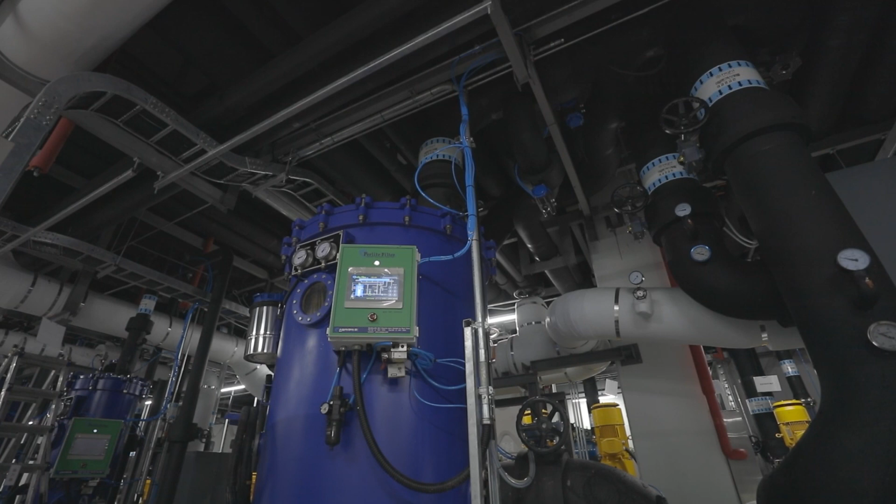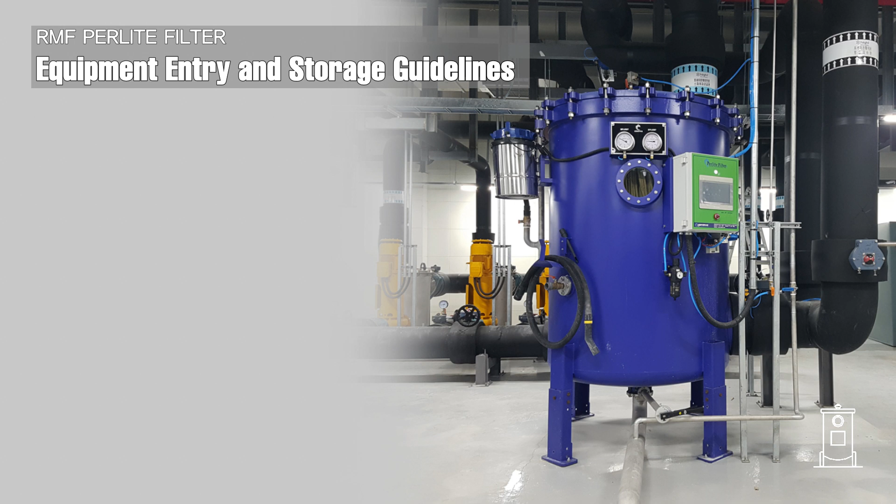Hello, and welcome to the commissioning guide for the Perlite Filter. The Perlite Filter is a high-efficiency system designed to conserve water by regenerating the media through a bumping process, eliminating the need for backwashing. In this video, we will guide you through the entire process, including delivery, installation preparation, and commissioning, to ensure your system is ready for operation.

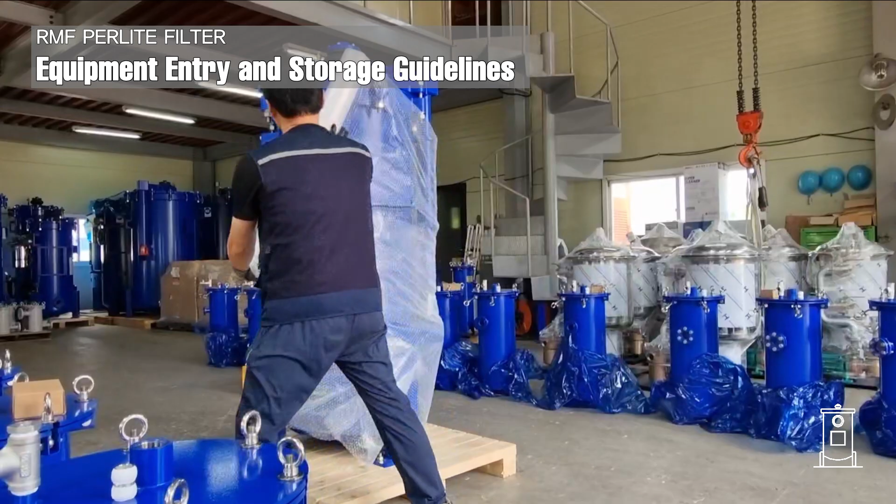This is the Perlite Filter, fully prepared for shipment. Before shipping, the equipment is securely fixed to a high-quality pallet to prevent movement and wrapped in protective material to avoid surface damage during transportation. During unloading, you may use a forklift to lift the pallet or the lifting lugs located on top of the filter.

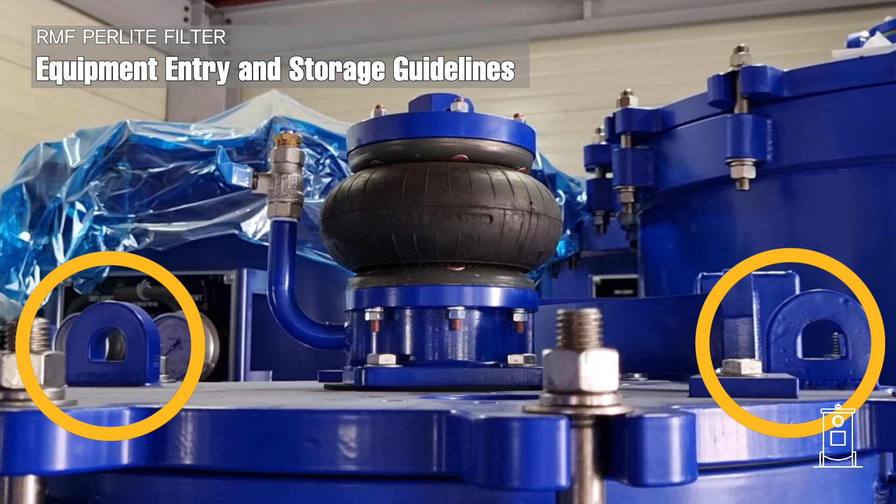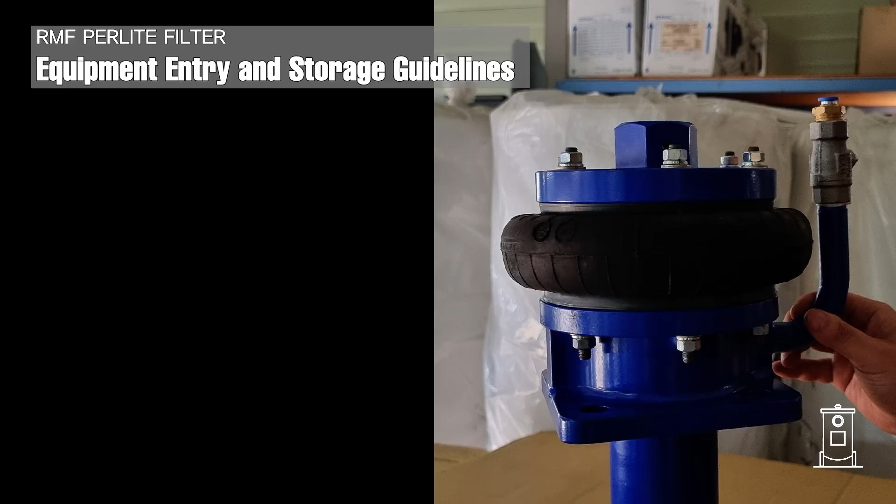Regardless of the method, always ensure the equipment is transported and stored in an upright position. After unloading, inspect the packaging for any damage and check that the bump tube pressure is properly maintained. If there are any issues, please contact Shinwa Aqua immediately.

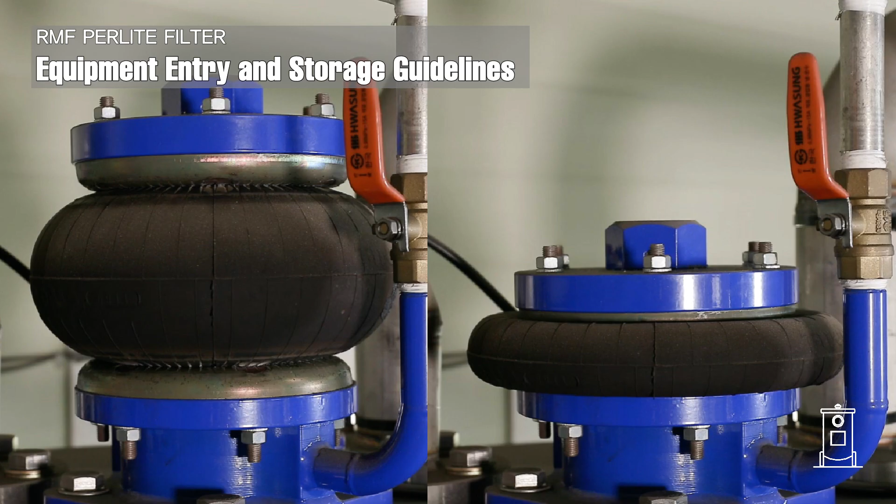If installation is delayed and the equipment needs to be stored for an extended period, ensure it remains in its original packaging and is stored in a stable environment with consistent temperature and humidity. Before relocating the equipment after long-term storage, ensure that the bump tube pressure has been maintained.

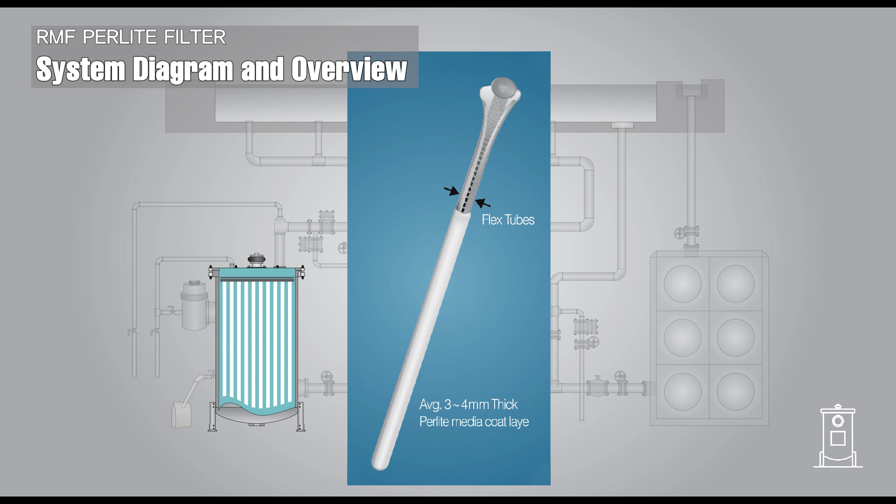Before starting the commissioning process, let's first review the system diagram and the key components of the Perlite Filter. The Perlite Filter works by coating the tube surfaces with perlite media, which filters dirt and particles from the water. Over time, as dirt builds up, the filtration efficiency of the media decreases.

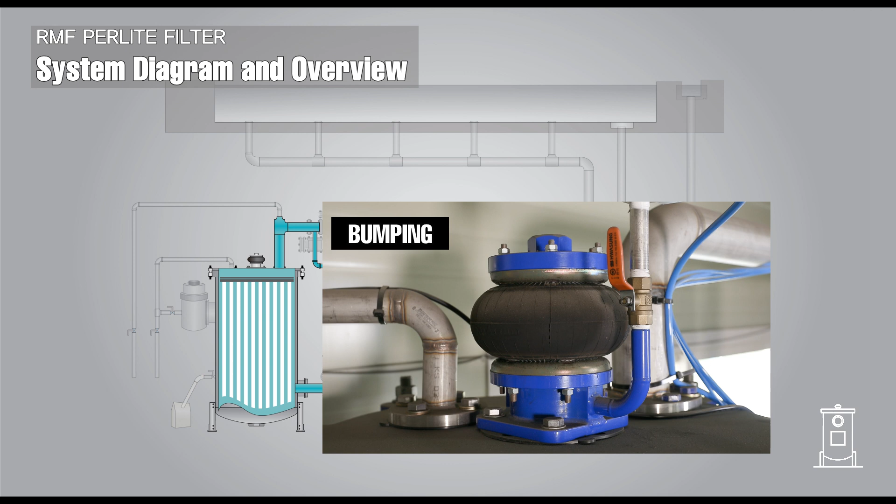When the media's efficiency decreases, the operator initiates the bumping process to restore optimal performance. During bumping, the bump tube expands and contracts repeatedly, shaking off the used media from the tubes and allowing it to fall into the water. The media is then recirculated through the pre-coat line, recoating the tubes and restoring filtration efficiency. This system allows the media to be reused multiple times without backwashing.

For optimal performance, ensure that all lines are installed precisely according to the system diagram. Special attention should be paid to the orange air vent lines, which play a critical role in removing trapped air from the filter and the system.

If the air is not fully vented, the media may not coat evenly on the tubes, reducing filtration efficiency. The air vent lines are also essential when emptying or refilling the filter during media replacement. Proper installation of the air vent lines ensures smooth and efficient operation of the Perlite Filter.

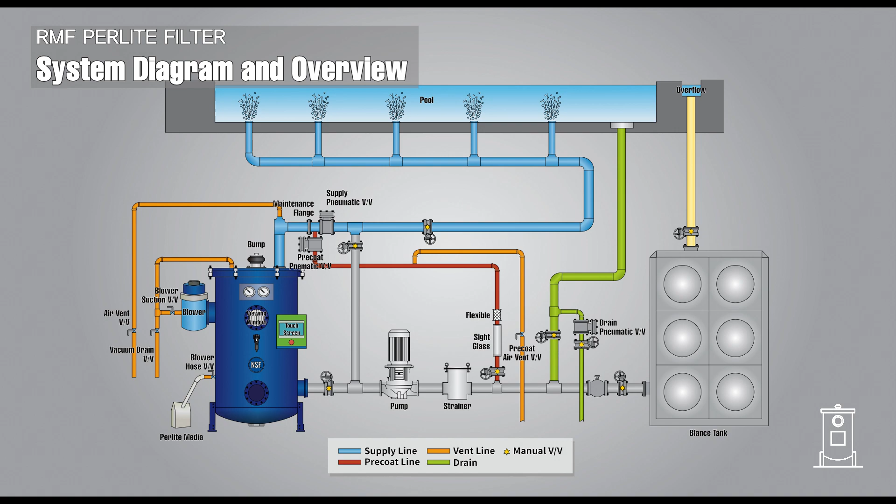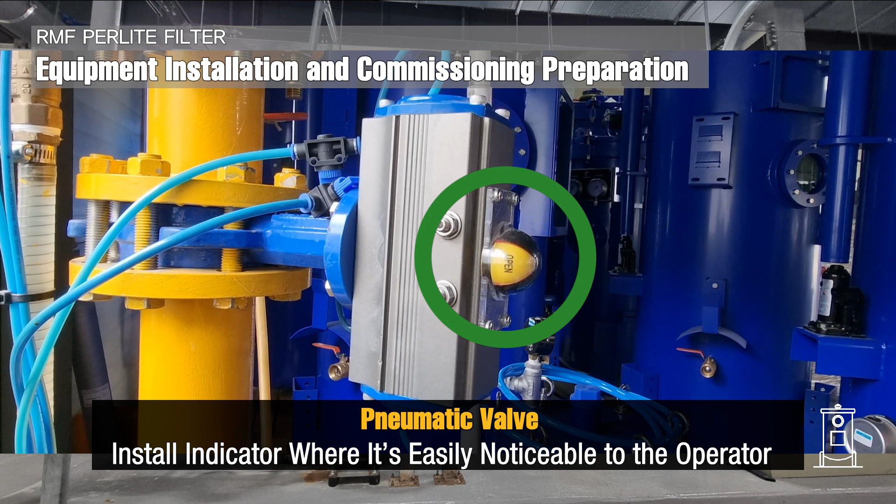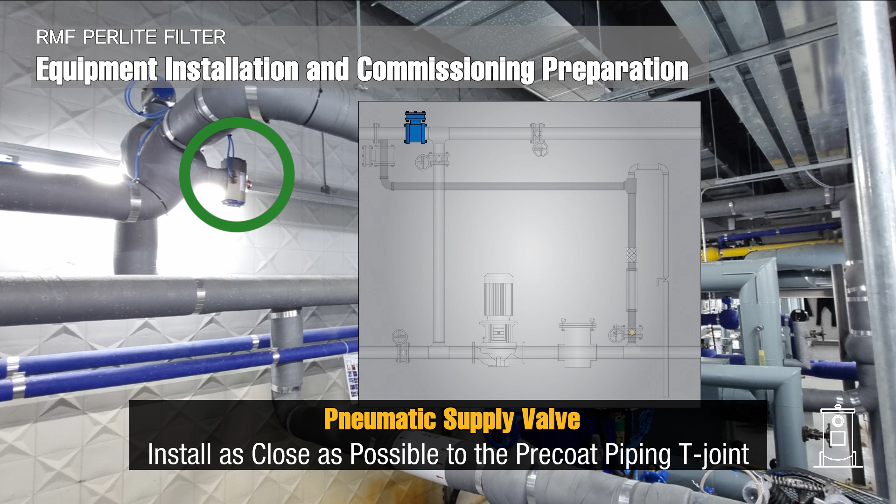We will now explain the installation and preparation steps. Pneumatic valves should be installed in positions where operators can easily monitor their status from ground level. The supply pneumatic valve should be installed as close as possible to the pre-coat T-joint to prevent media from clogging the lines or leaking into the pool.

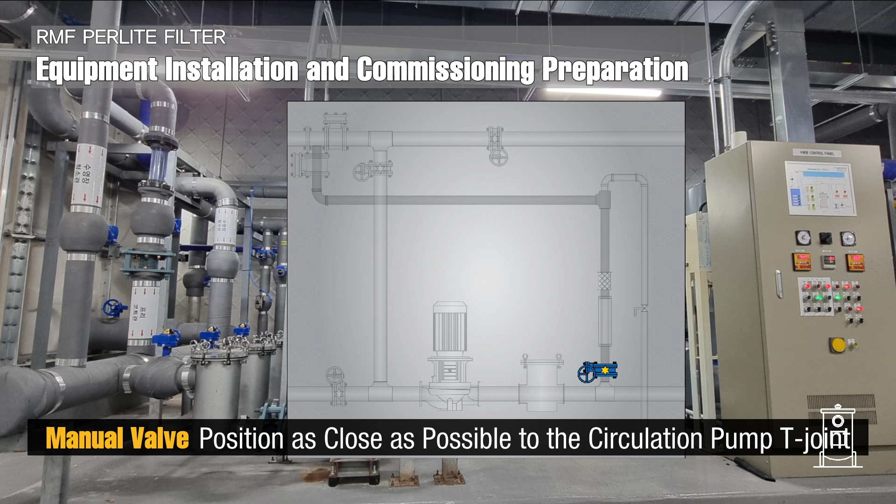The pre-coating line should be assembled in the following order: pneumatic valve, flexible, sight glass, and manual valve. The manual valve should be installed near the circulation pump's T-joint to minimize air intake, which can reduce efficiency. It is also important to connect an air vent pipe to the pre-coating line and install a corresponding valve.

After installing the regulator, adjust the pressure to 6 bar or higher. The Perlite Filter is equipped with a pressure switch that automatically stops the system if the pressure drops below the required level. Adjust the pressure by turning the regulator knob clockwise to increase or counterclockwise to decrease the pressure. Once the desired level is reached, press the knob to lock it.

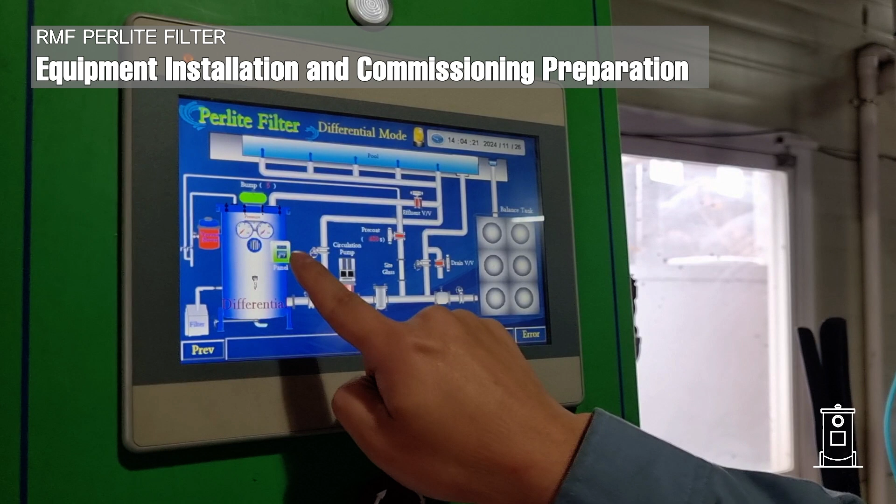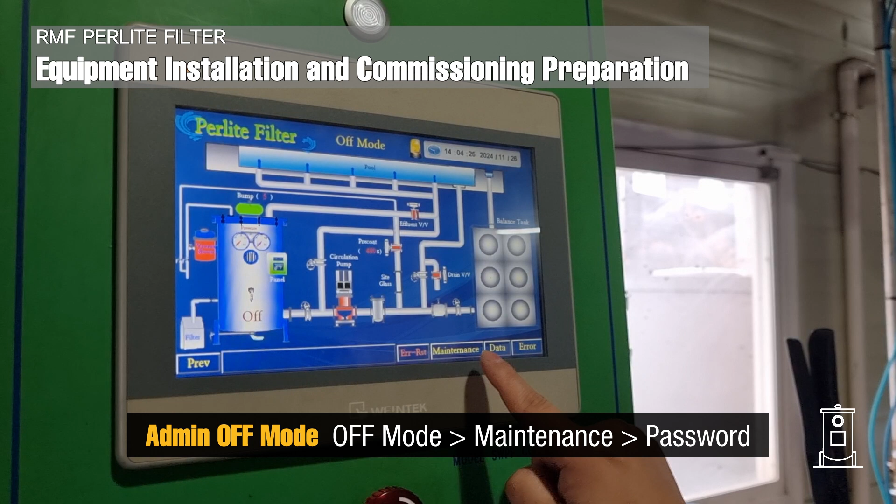After completing the installation, you can verify the proper connection of the pneumatic valves in admin off mode. First, touch the panel on the touch screen to switch to off mode, then press the start button. Next, access the maintenance menu at the bottom of the screen and enter the password to enable admin off mode. This menu is located internally to prevent accidental touch operations.

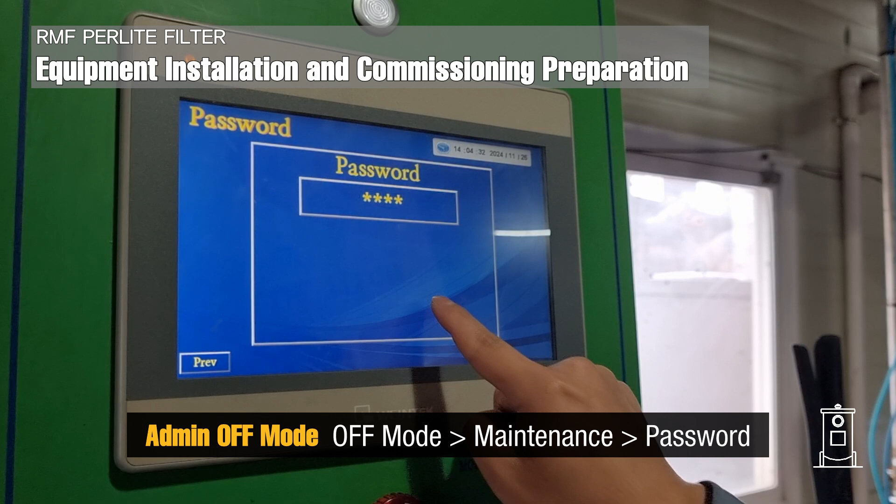On the screen, touch the icons for the valves and pumps to confirm their connection and operational status. Additionally, check the relay lights inside the control panel to ensure they are functioning correctly.

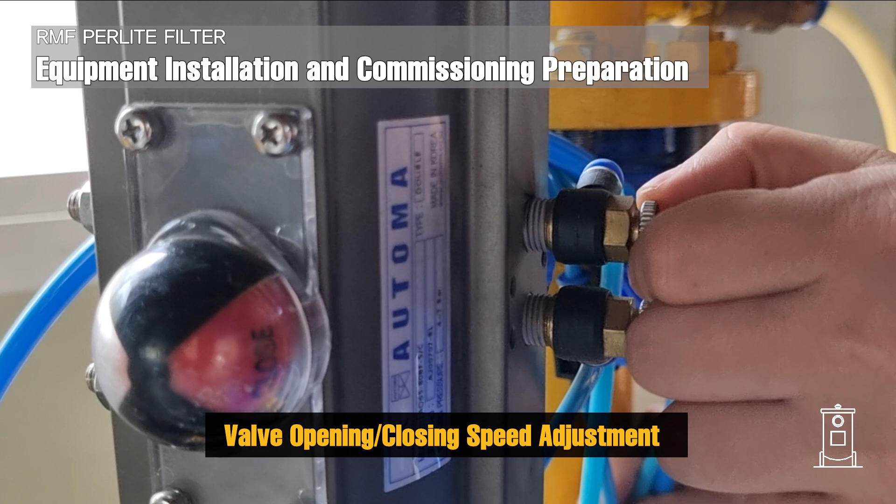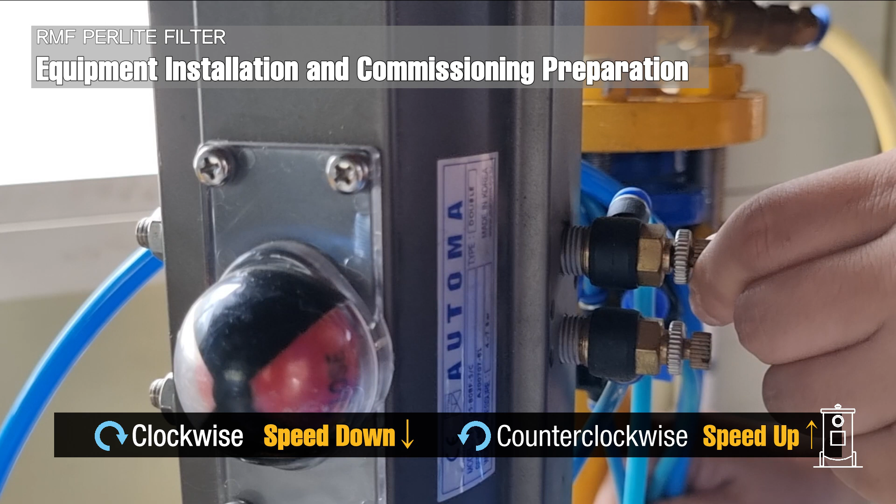To prevent water hammer and protect sensitive components, such as the sight glass, adjust the opening and closing speed of the valves. Use the speed controller on each pneumatic valve to make the adjustments. Turn the adjustment screw clockwise to reduce the speed or counterclockwise to increase it. After completing all verifications, ensure all valves are set to the closed position.

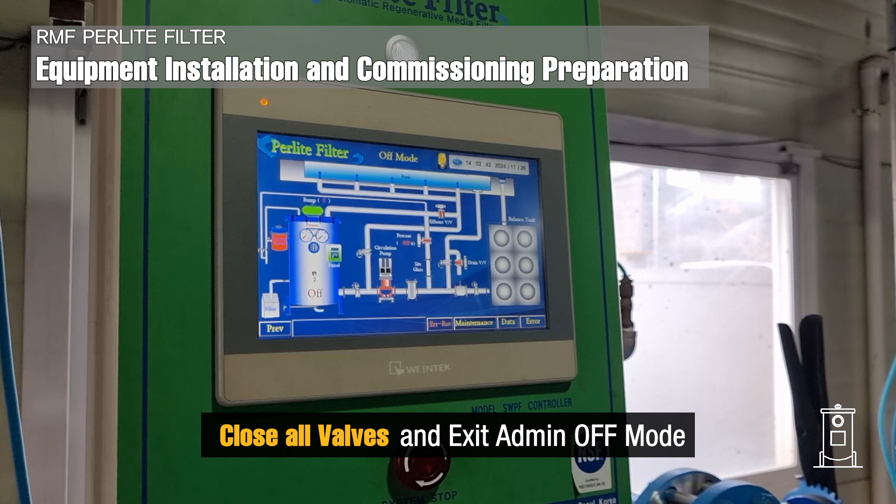Next, we will explain the touchscreen configuration and operating modes of the Perlite filter. The Perlite filter offers 3 operating modes, which can be selected by touching the panel on the screen.

Off mode is a state in which the circulation pump is turned off, typically used during media replacement or equipment maintenance. Manual mode allows you to execute the bumping process manually by directly selecting it on the screen. Timer mode operates similarly to manual mode but enables you to set a timer for automatic execution of the bumping process.

To change the operating mode, press the e-stop switch located at the center bottom of the panel to completely stop the system. After waiting about 3 seconds, release the switch by turning it to the right. Once the system has fully stopped, touch the panel to select the desired operating mode.

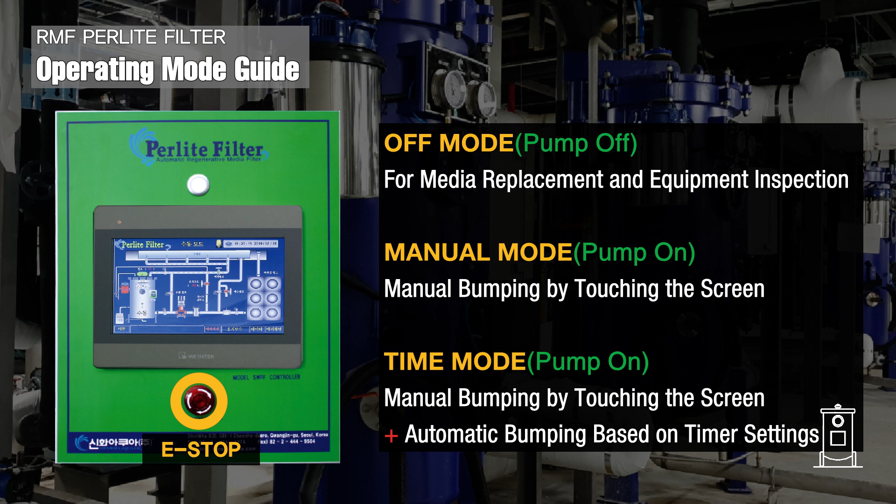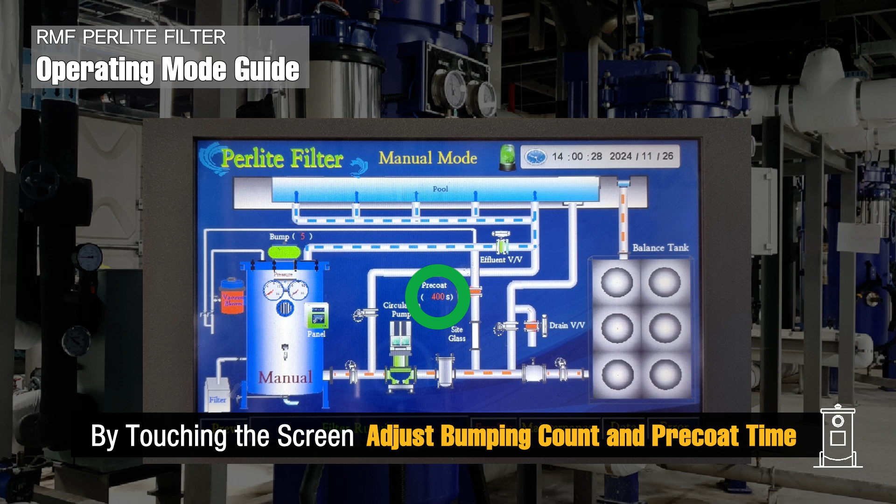The e-stop switch can also be used to stop the system in emergencies. On the screen, you can touch the numbers above the bump tube to change the bumping frequency. You may also touch the numbers below the pre-coat line to adjust the pre-coating duration.

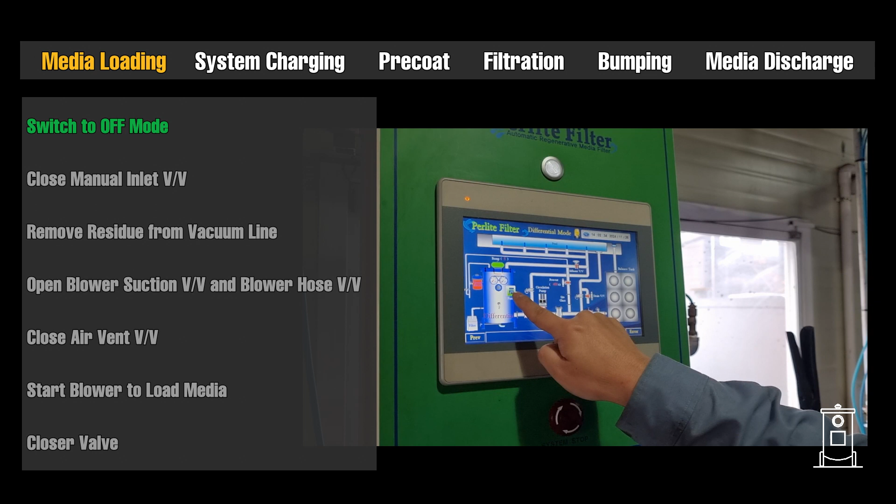Now that the preparations are complete, we will begin the commissioning process by loading the filter media. First, switch to off mode. Close the manual inlet valve at the front of the filter, and ensure that the tank is completely empty.

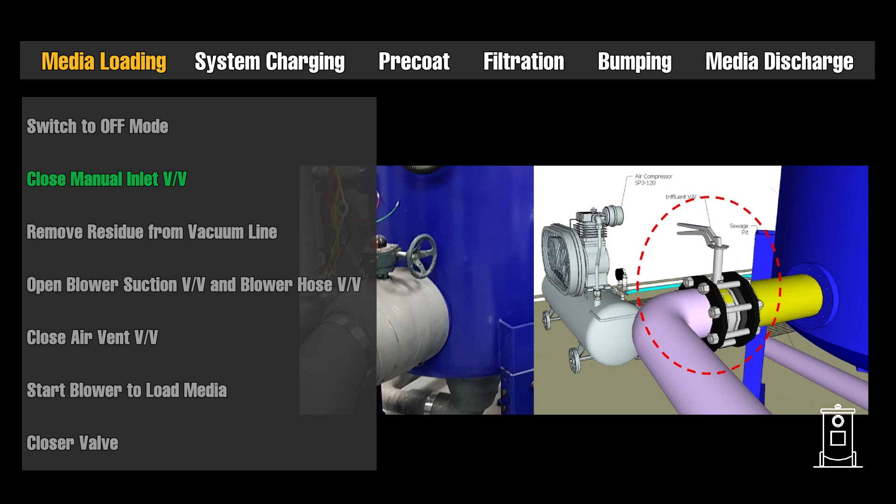Open the vacuum drain valve to remove any residual water or debris from the pipeline, then close the valve. Open the blower suction valve and the blower hose valve. Ensure the air vent valve is closed, and recheck that the vacuum drain valve is also closed.

On the touch screen, press the blower button, and use a hose to add the appropriate amount of filter media into the filter.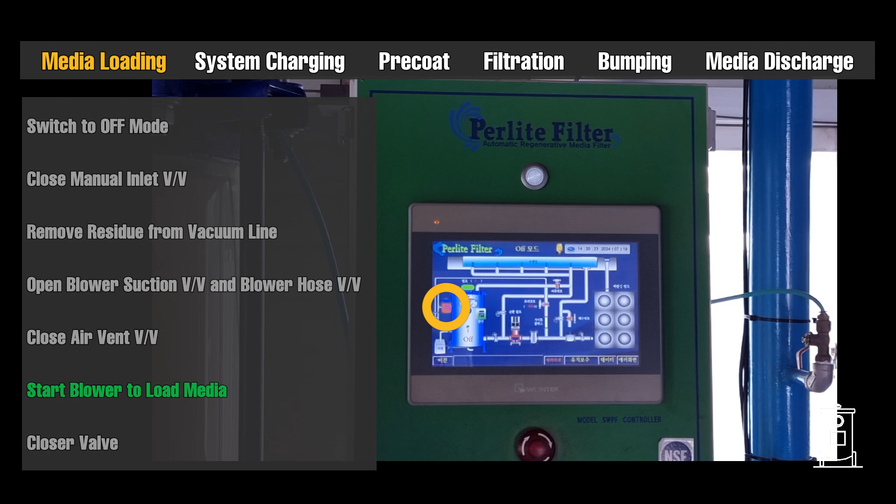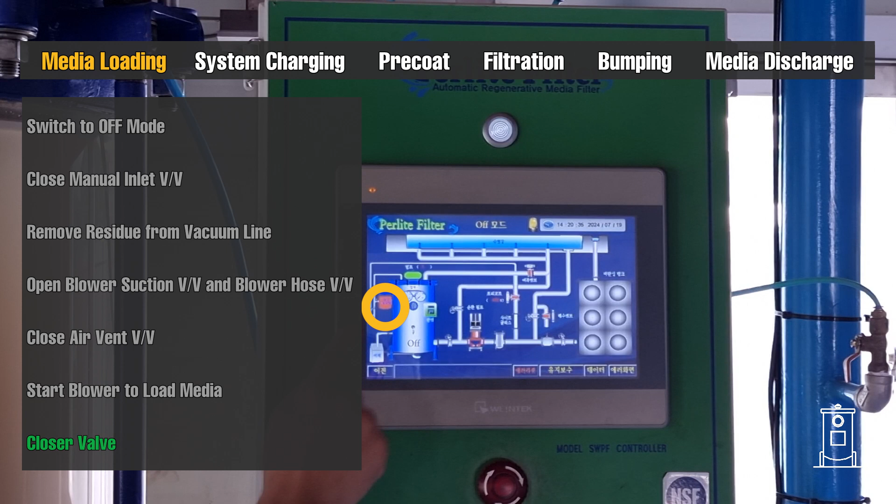Once the media has been fully loaded, press the blower button on the screen again to stop the blower. Then close both the blower suction valve and the blower hose valve.

Next is the process of filling the filter and pipeline system with water. To begin, open the manual inlet valve located in front of the filter to allow water to flow into the tank. Open the air vent valve to release trapped air and ensure the tank fills smoothly.

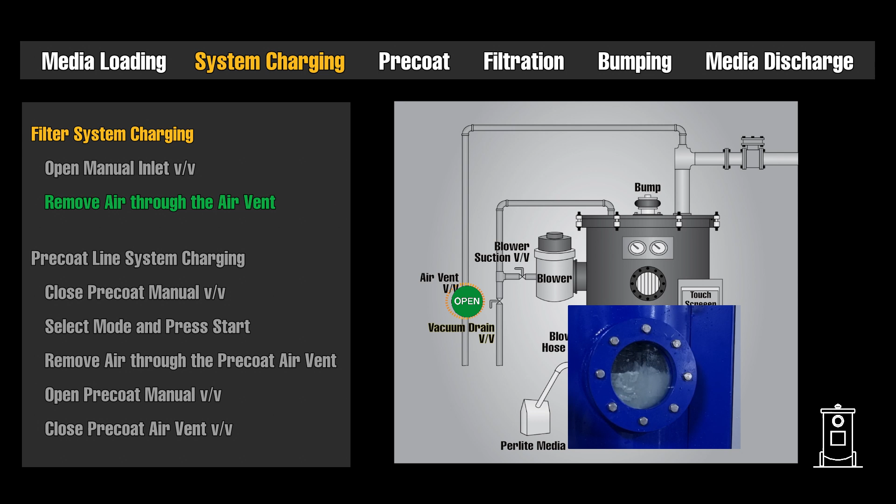Check the water level through the viewing window, and when you hear water flowing through the pipes, close the air vent valve. The pre-coat line shall also be filled using the manual valve. Close the manual valve located at the bottom of the pre-coat line.

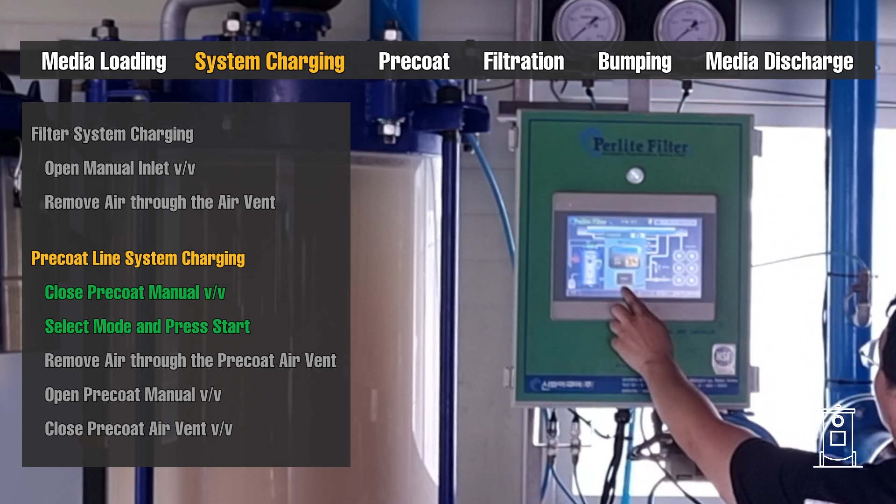Next, touch the panel on the screen to switch to manual mode or timer mode, and press the start button to proceed. Once the operating mode is selected and the system is started, the pre-coating process will begin automatically.

As the pre-coat pneumatic valve opens and water flows into the pre-coating line, open the pre-coating air vent valve to remove any remaining air. After air has been vented enough, gradually open the manual valve fully and close the air vent valve.

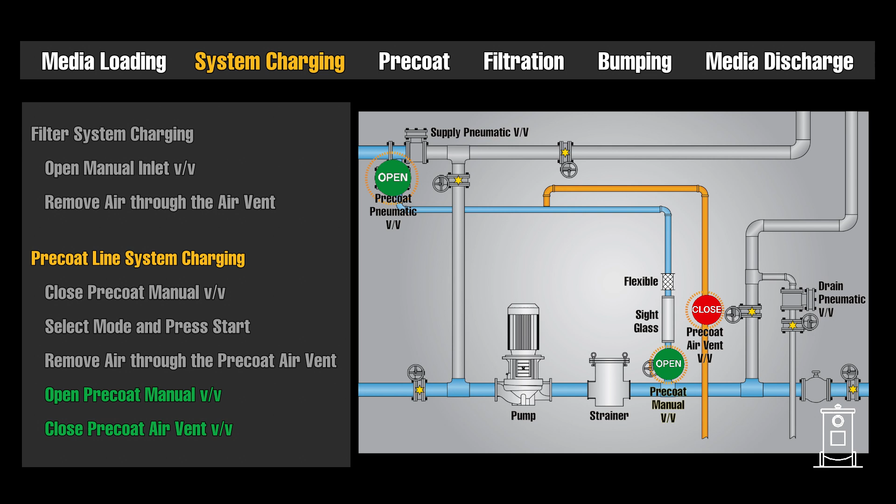The pre-coating process will run for the duration set in the system parameters. During pre-coating, check for proper air removal and confirm that the media is evenly coated.

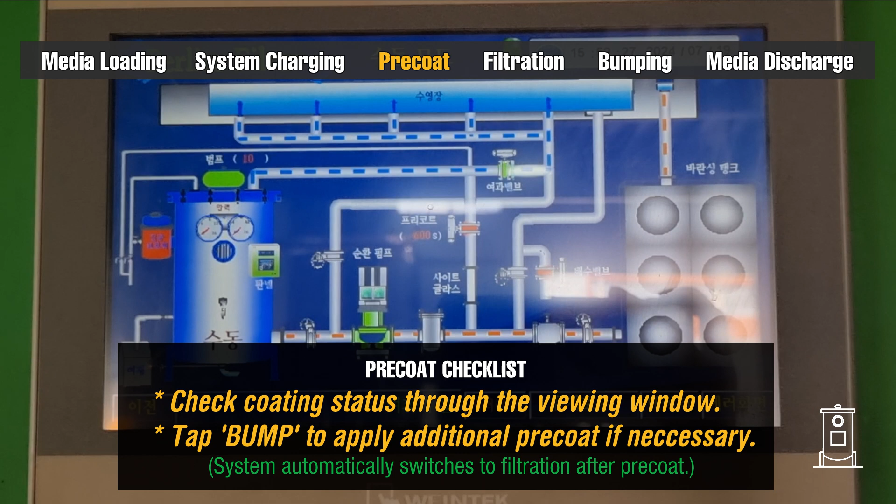If the media does not coat properly after the initial loading, press the bumping button on the screen to perform additional pre-coating, allowing the media to fully absorb water. When the pre-coating is complete, the pre-coating valve will close, and the filtration valve will automatically open, starting the circulation filtration process.

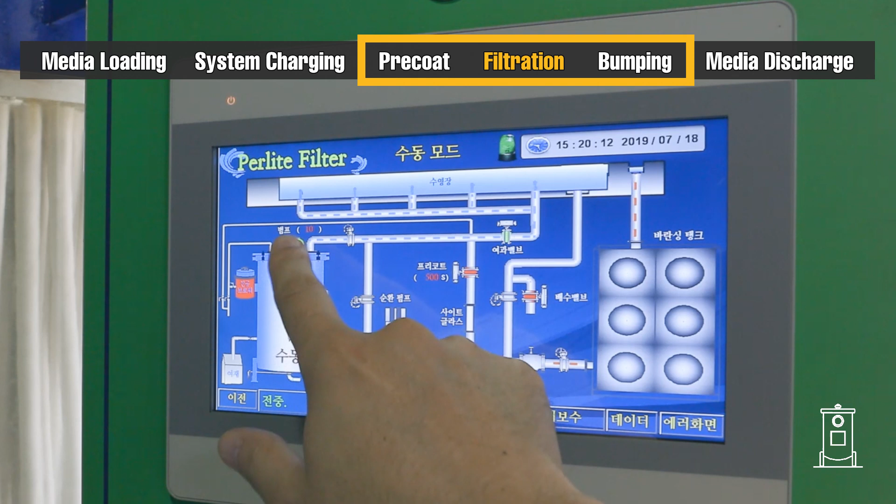Once the circulation filtration process begins, the system can be managed with minimal interaction through simple controls. Touching the bump tube button once a day allows the system to automatically perform bumping, pre-coating, and circulation filtration processes.

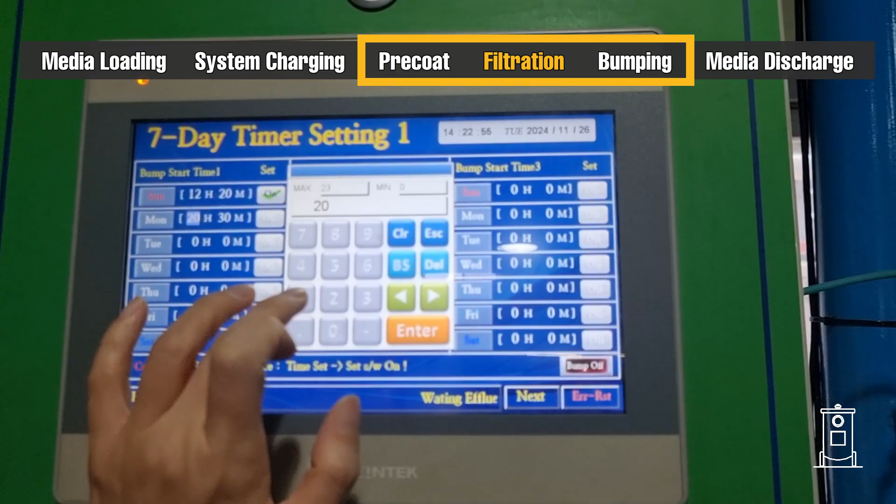If a timer is set and the system is operated in timer mode, these processes can run automatically without any manual input. Detailed instructions for setting the timer are provided later in this video.

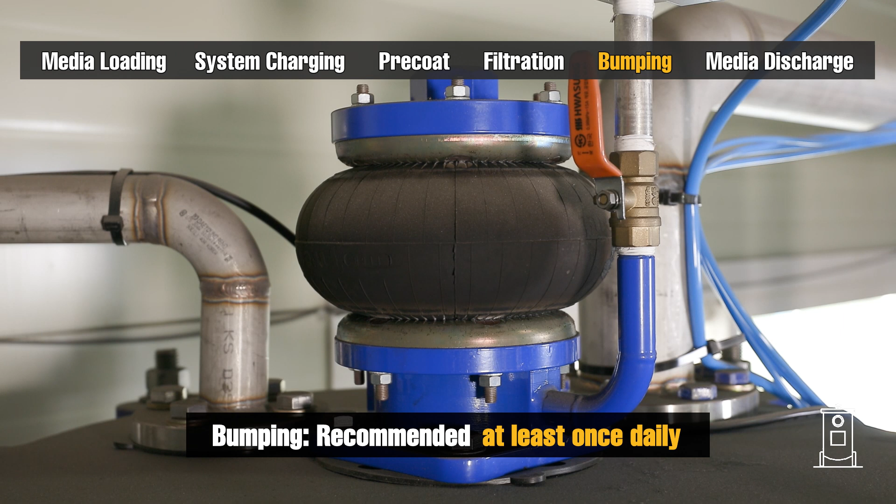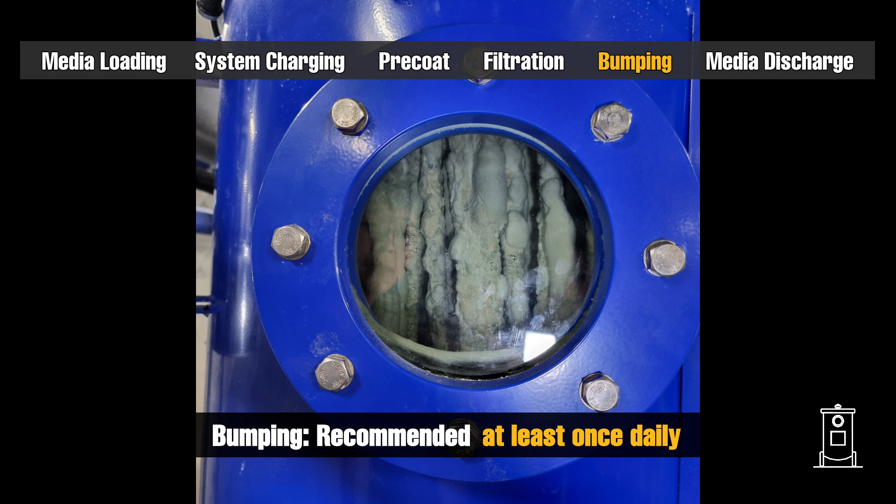It is recommended to perform bumping at least once a day. During off-seasons or when there are fewer visitors, the pressure difference between the inlet and outlet water may be minimal, which can result in bumping not being executed.

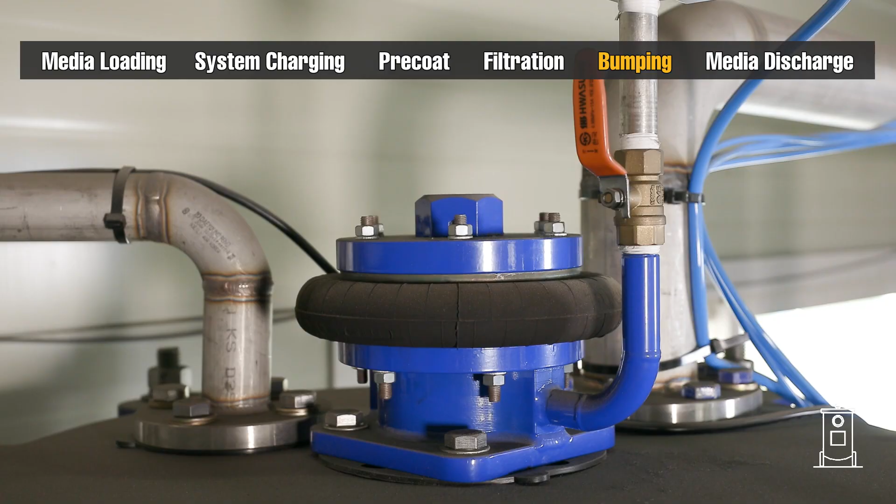Next is the process for replacing the used media and rinsing the inside of the filter. The timing for media replacement can be determined by checking the pressure gauge at the top of the filter.

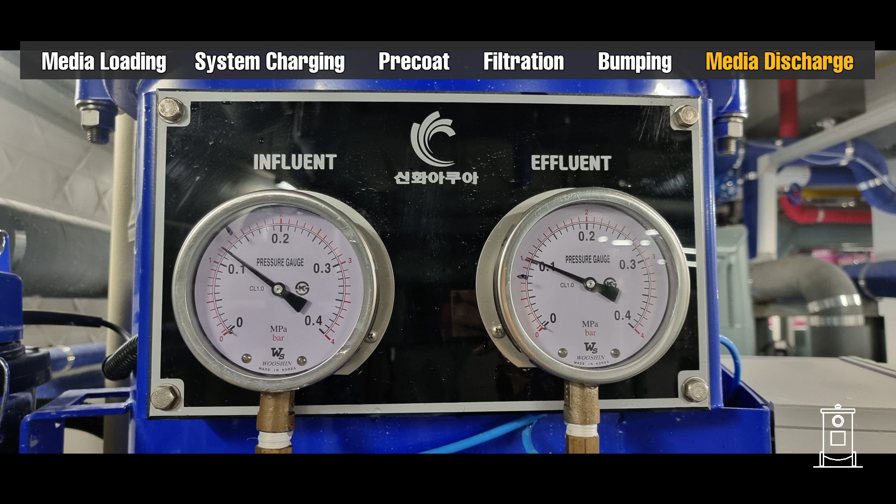When new media is first loaded, the pressure difference between the inlet and outlet water typically ranges between 0.2 and 0.4 kilograms per square centimeter. However, if the pressure difference remains above 0.7 kilograms per square centimeter despite daily bumping, it indicates that the media needs to be replaced.

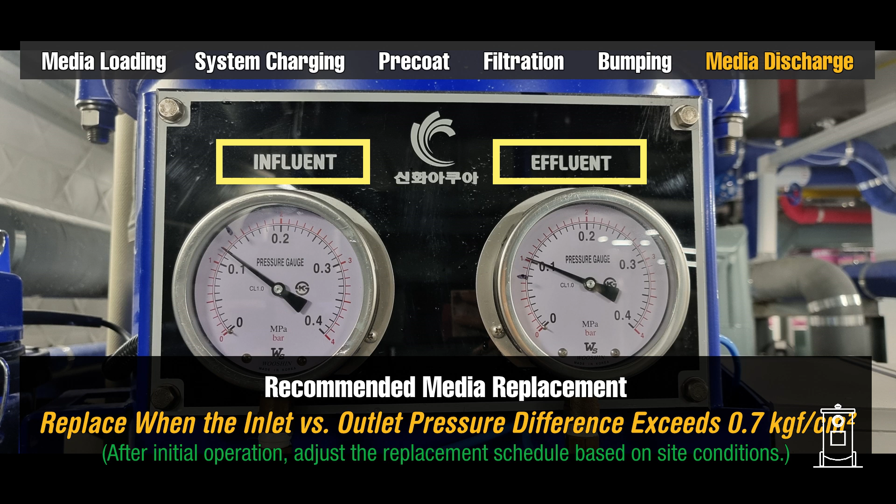Other indicators may also be observed, so it is recommended to monitor the system during the initial operation phase and establish a replacement schedule suited to your facility's needs.

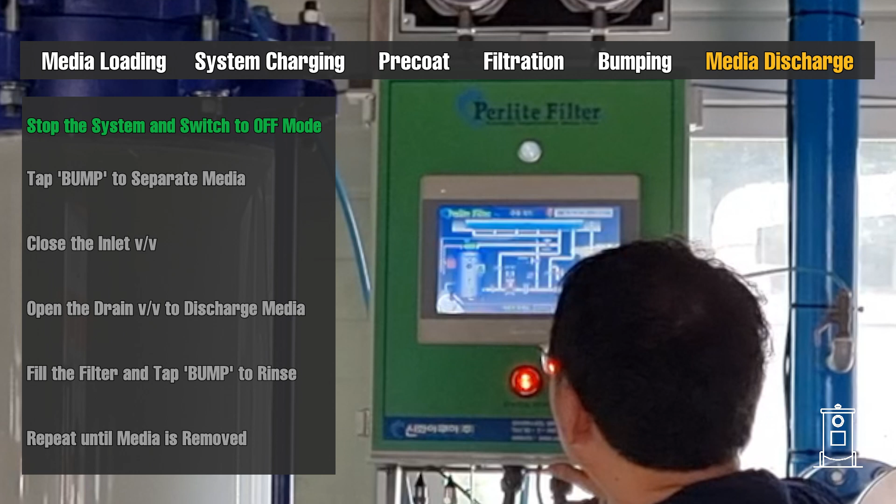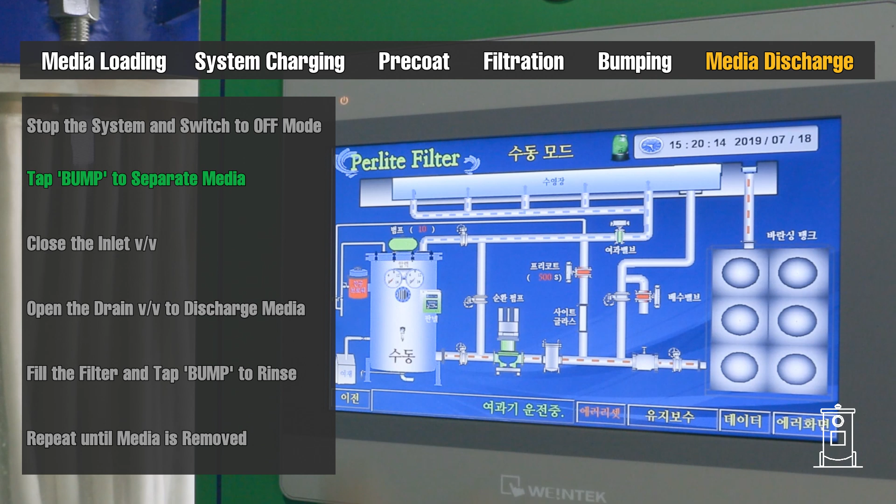To begin the media discharge process, press the E-stop button located at the center bottom of the filter panel to stop the system completely. Then, touch the panel on the screen to switch to off mode. On the touch screen, press the bump button to manually perform bumping until the media is fully loosened from the tubes. Close the water inlet valve.

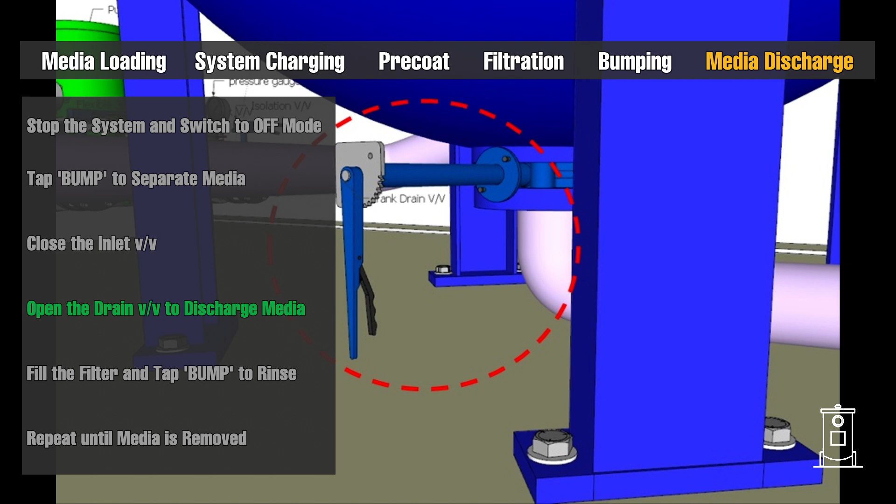Open the manual drain valve located at the bottom of the filter and check if the media is being discharged into the sewer. At this point, open the air vent valve at the back of the filter to ensure smooth media discharge. Once the discharge is complete, close the drain valve.

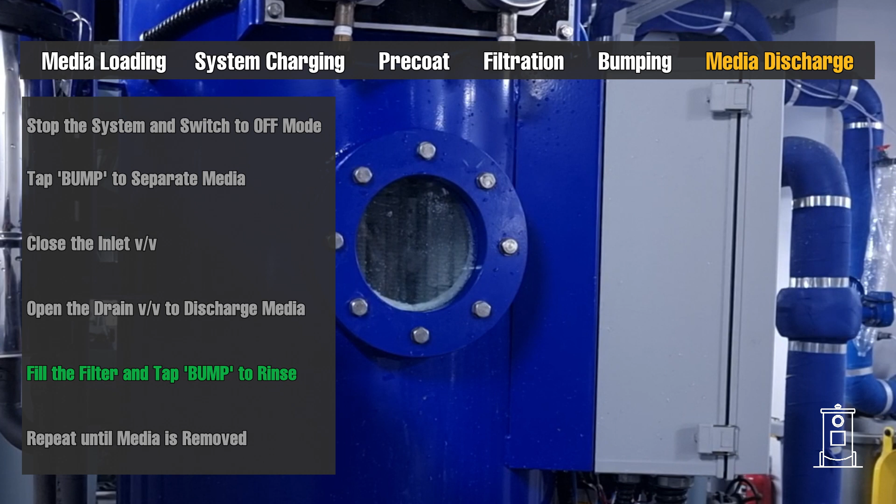To begin rinsing, open the water inlet valve to refill the filter with water. Then open the air vent valve to release trapped air, allowing the water to flow in smoothly. Once the filter is properly filled, close both the water inlet valve and the air vent valve.

On the panel, press the bump button to perform bumping. Repeat this process 2 to 3 times until the media is thoroughly rinsed out of the tubes. After completing the rinse process, proceed with media loading as previously demonstrated.

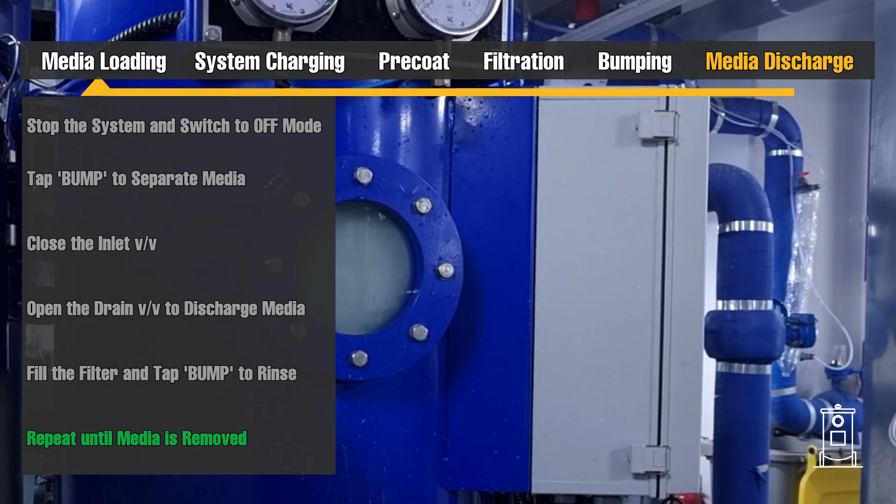Next, we will explain how to set the timer for operating in timer mode. On the touchscreen main menu, navigate to the maintenance menu and select the weekly timer settings.

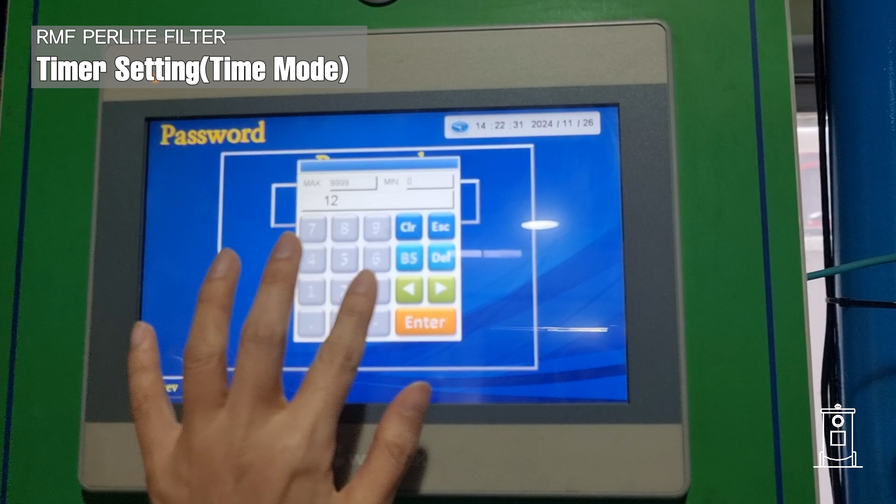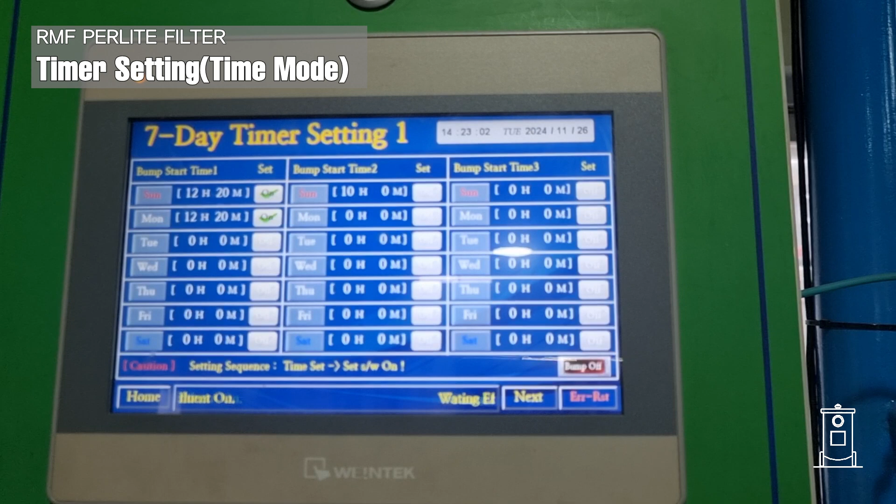In the table, touch the desired day, hour, and minute to configure the timer. Use the checkboxes to activate or deactivate specific time slots as needed.

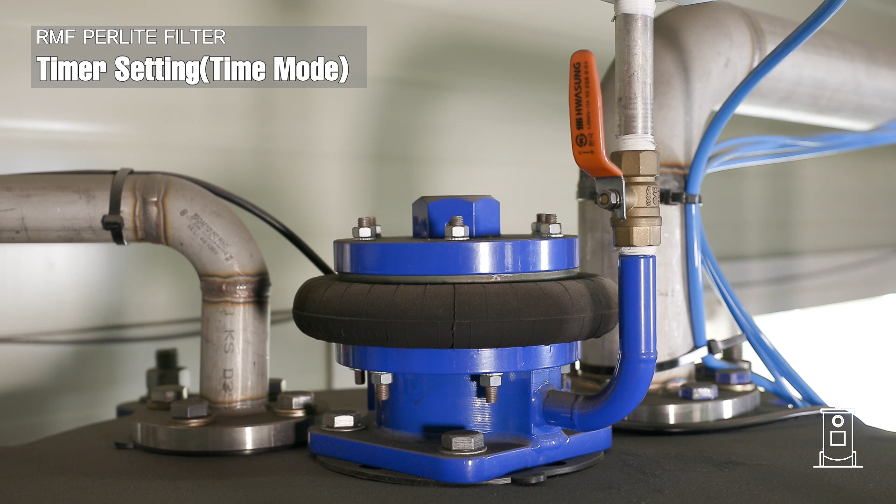Once the timer is set and the filter is running in timer mode, bumping will be performed automatically at the scheduled times. After bumping, the system will automatically switch to pre-coat, and once the pre-coating process is complete, it will transition to filtration. The timer allows for up to 3 scheduled operations per day.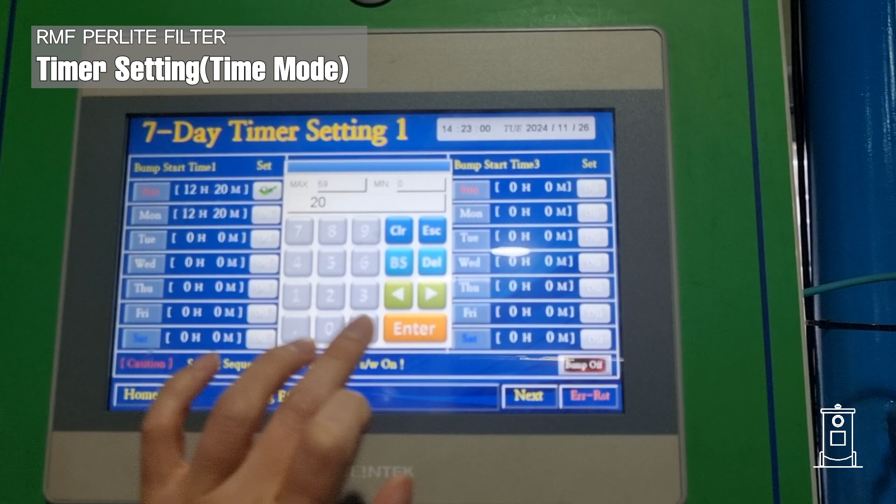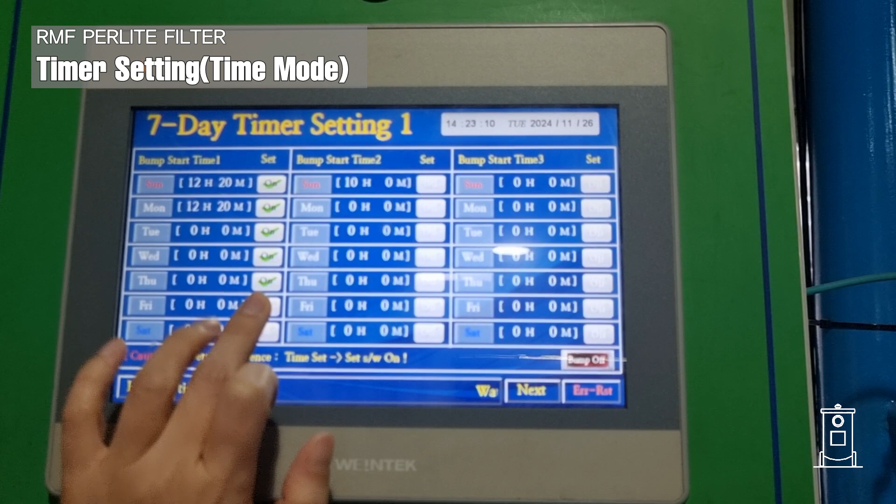However, setting multiple timers for the same time on the same day can cause system errors, so ensure no overlapping schedules are configured. Please note that these timer settings are effective only when the filter is operating in timer mode.

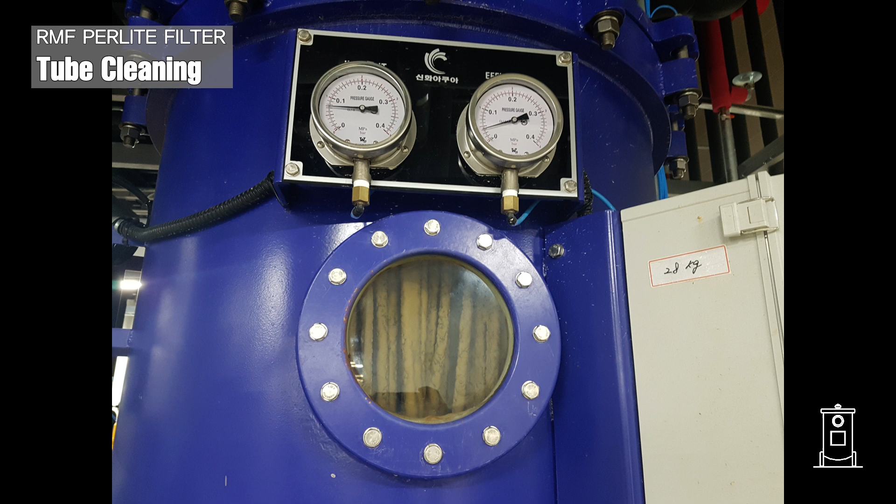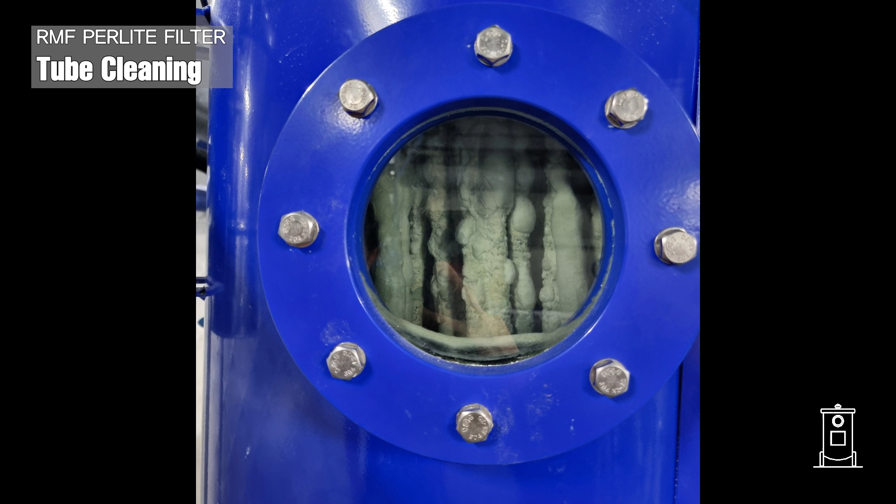Next, we will explain the procedure for cleaning the tubes. If the tubes are not cleaned regularly, they may become unclean even after replacing the filter media, which can shorten the lifespan of the media. Therefore, regular tube cleaning is essential to maintain the efficiency of the filter system.

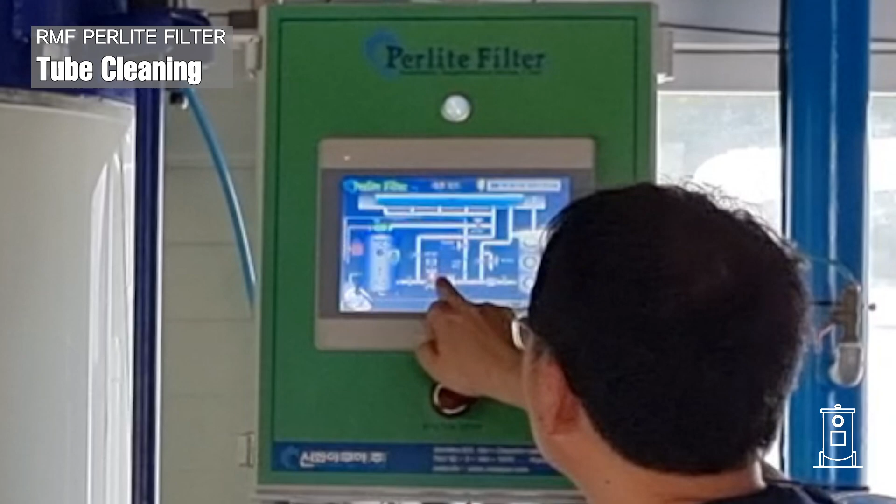To begin cleaning, press the E-stop button to completely stop the system. Then touch the panel on the main screen to switch to off mode. On the touch screen, press the bumping button to perform bumping until the media is sufficiently dislodged from the tubes.

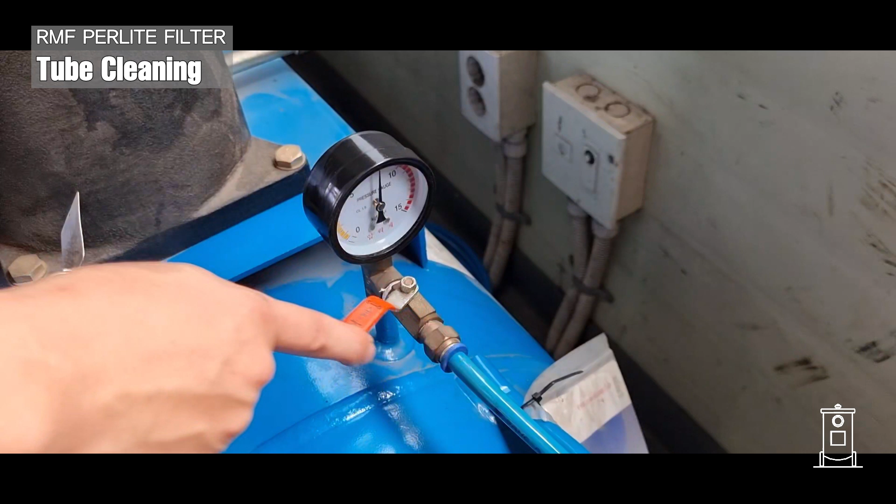Before starting the tube cleaning, pull up the cap on the compressor to turn it off. Next, close the air valve on the compressor. Then press the air release button located at the bottom of the regulator and wait until all the air has been released. When the sound of air release stops, push the button back to lock it.

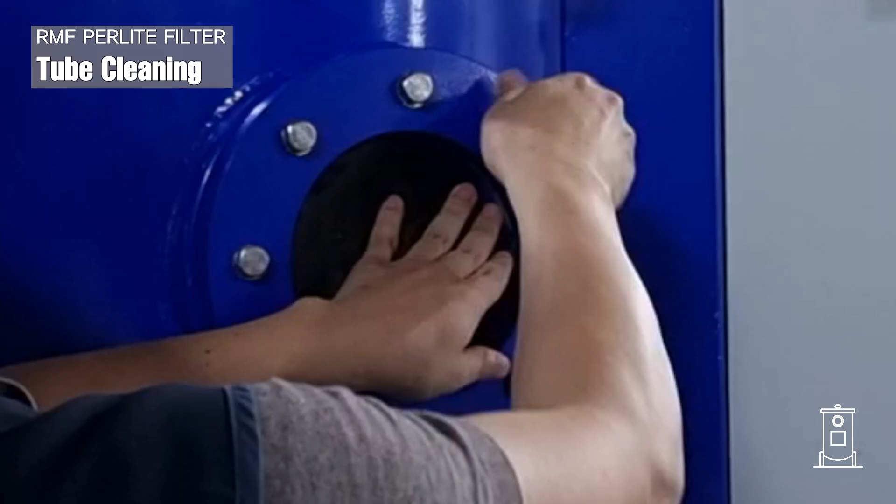When removing the viewing window, keep the lower bolts in place to prevent the glass from falling. Remove the glass first, and then loosen the remaining bolts.

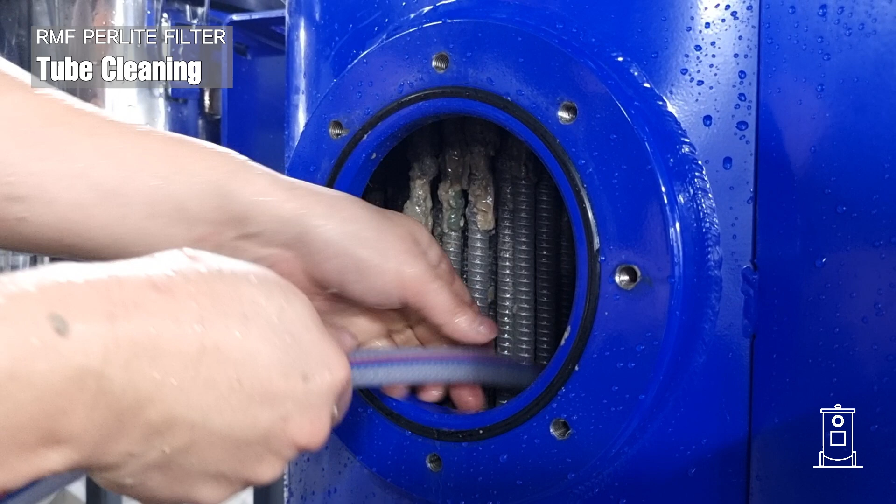For regularly maintained filter systems, a standard garden hose is usually sufficient for cleaning. Narrow the end of the hose by hand to create a stronger water stream for easier cleaning. If the filter has not been cleaned for an extended period, this method may not be sufficient.

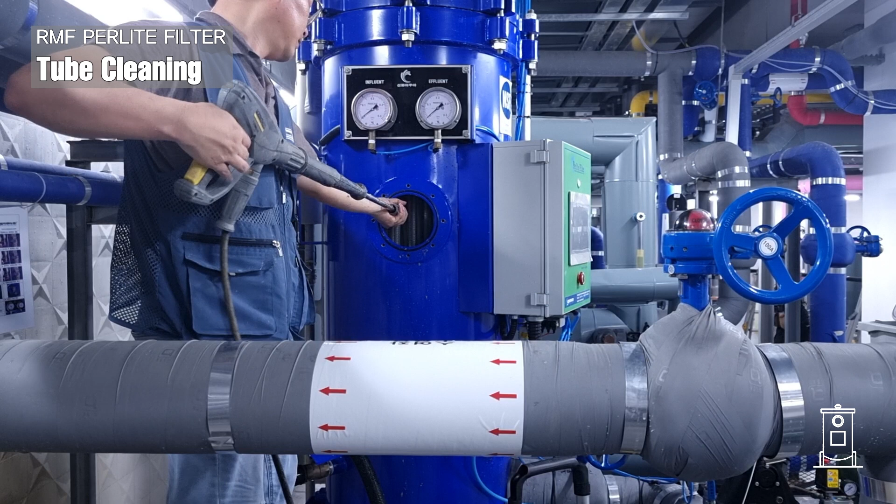In such cases, use a high-pressure washer as shown in the video to clean the tubes. To protect the equipment, wrap a rag around the nozzle of the washer. This will prevent it from scratching or causing damage to the filter flanges.

Since the bump tubes have been deflated by releasing air, you can manually rotate them during cleaning by turning the tubes on their axis to ensure all sides are thoroughly cleaned.

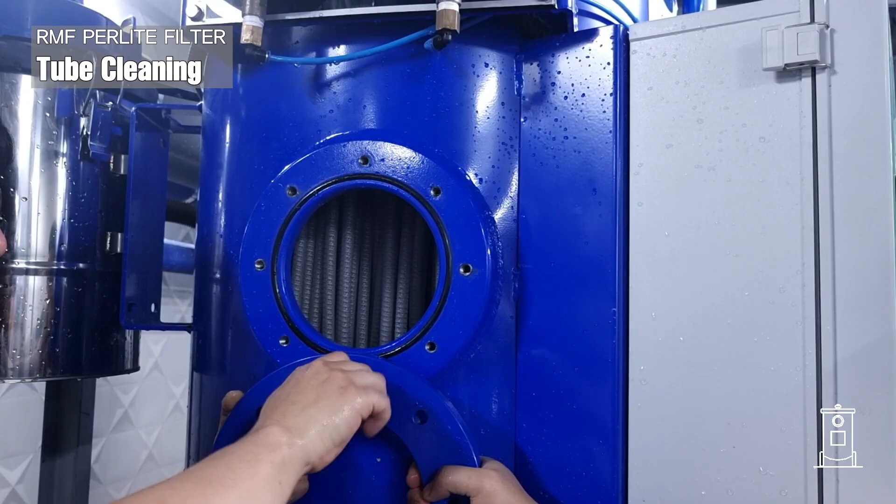Once the cleaning is complete, reattach the viewing window in reverse order, load the media, and restart the system. This process helps maintain optimal filter performance by ensuring the tubes are effectively cleaned.